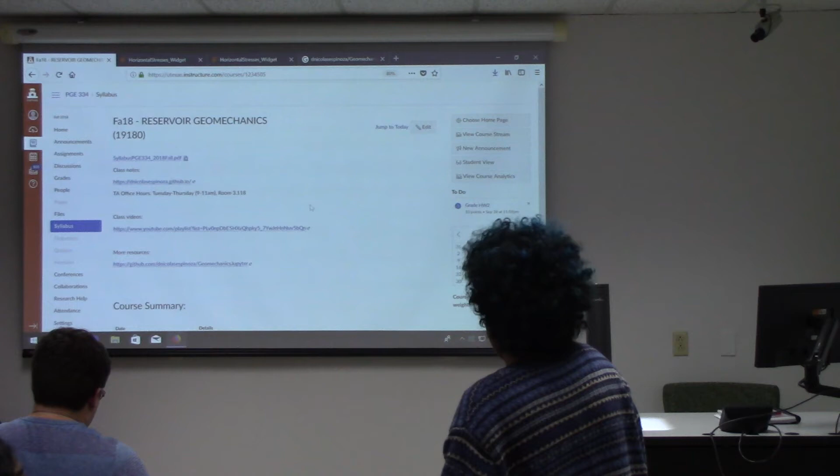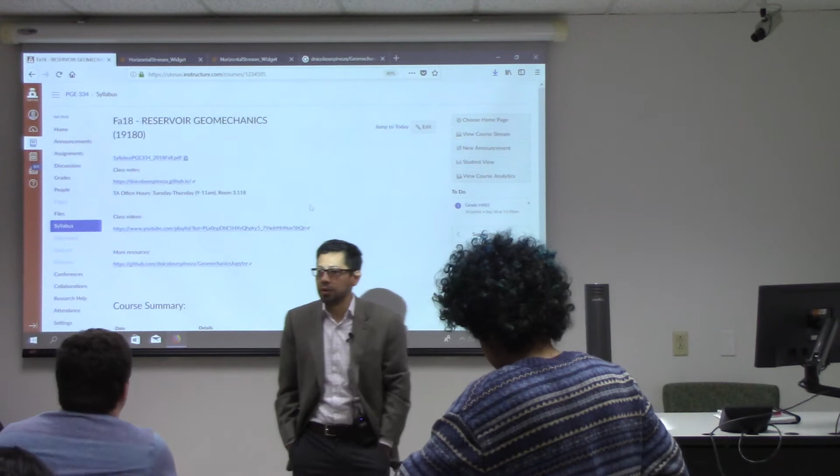Any questions about the homework? Going well or not? This is your time to ask me some questions if you can't solve it, because it's due tomorrow, remember? So anything I can help clarify, anything that wasn't clear from the lectures? No?

I have some good news for you. If you didn't check the emails, you can go here to YouTube, and they are already uploaded, all the classes. I'm going to continue uploading all of them.

I have some bad news, though. First one, I was looking at the videos—they're quite boring. Okay, so I'm going to try to be a little bit more cheerful to make these videos a little bit better. And second, you guys can see it over there as long as you don't touch the cable, okay? Or you can plug it and unplug it very quickly if you want to.

And second, I need to fix some of the audio issues. There is one lecture in which the audio is not great, and there is another lecture in which there is no audio at all. So I'll try to see if I add subtitles or if I can add audio on top of that, but I'll try to fix that.

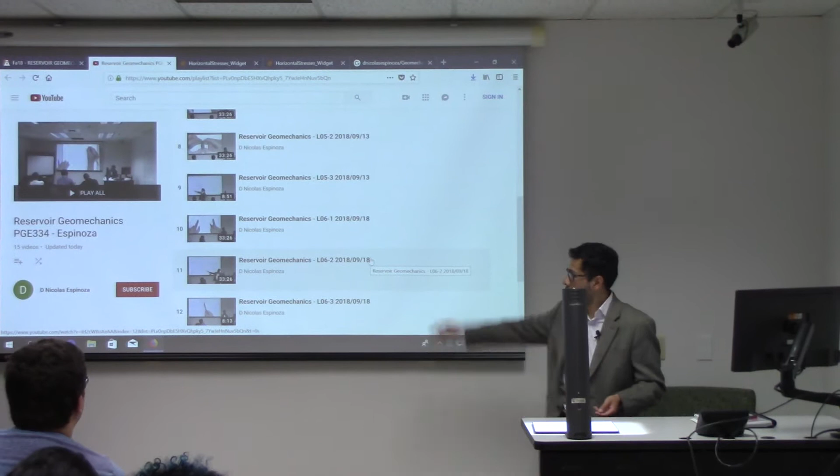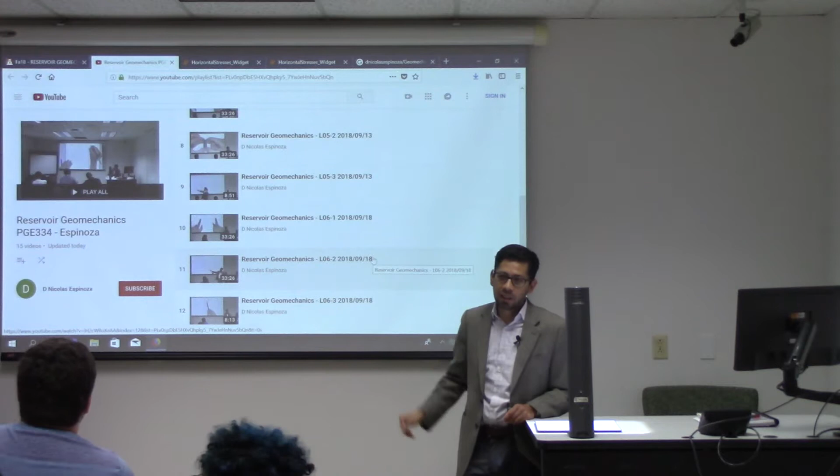If you have any questions, just let me know. So I'm going to continue uploading all the videos. And I have figured this YouTube thing now, how to upload videos quickly, so it wasn't as bad as I thought. And actually, you can do some editing there too, which is very, very convenient. So I have to do a little bit of editing to some of them, but the videos are going to be there, okay? And one more thing is that Jeffrey has been working very hard in order to upload the homework solution.

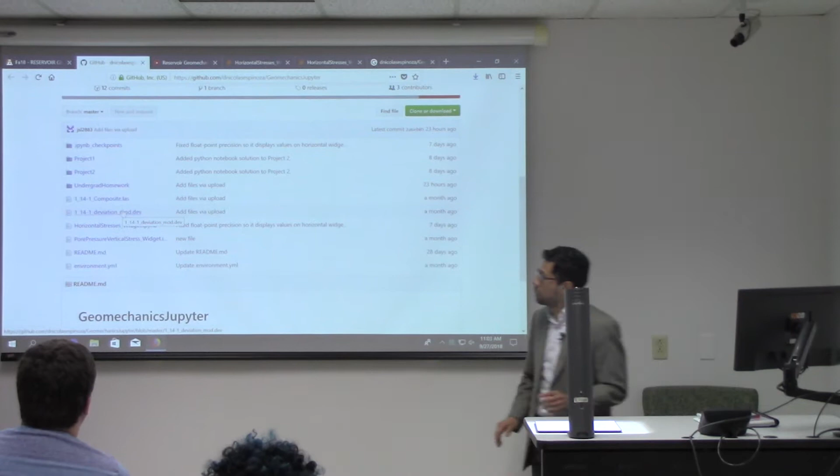Okay, let me come back here. If you go here to more resources, this goes into a folder where I'm putting some of the files that you were using already and some of the widgets that I was showing you, just to show stresses or anything, varying some parameters to understand what is the influence of those parameters. And you can download those and upload them, make them run with Python to see how they work.

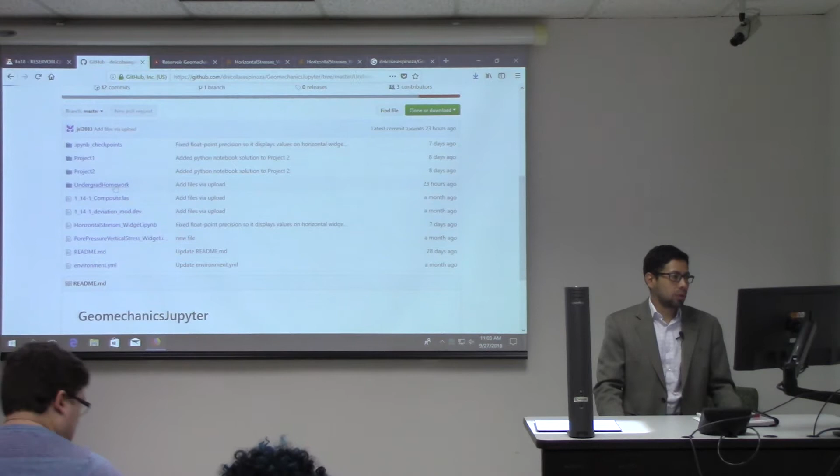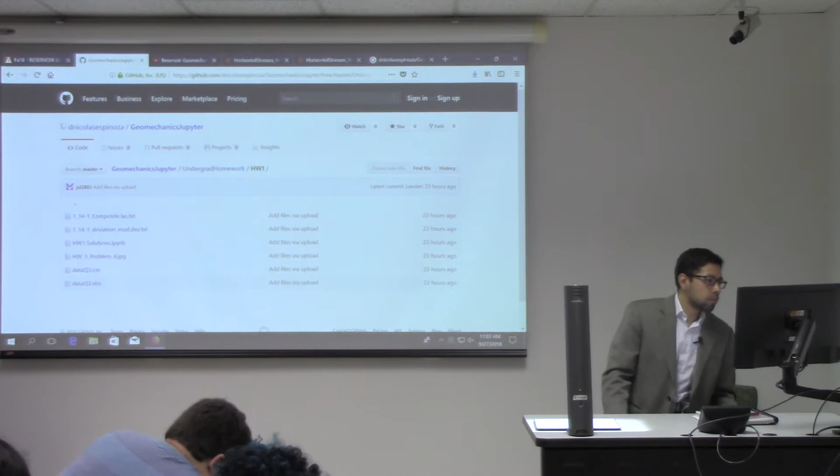But also here, if you go to this undergrad homework folder, you will see that Jeffrey already added homework number 1. And in homework number 1 solution, if you open this file, you will see all the solution with this Jupyter notebook. And actually here, you see you have all the data already compiled. Jeffrey is very good, he's very neat in writing everything. And I think he borrowed—you see here's the solution, and here you have all the code, right? All the code that you need, you can get it from here too.

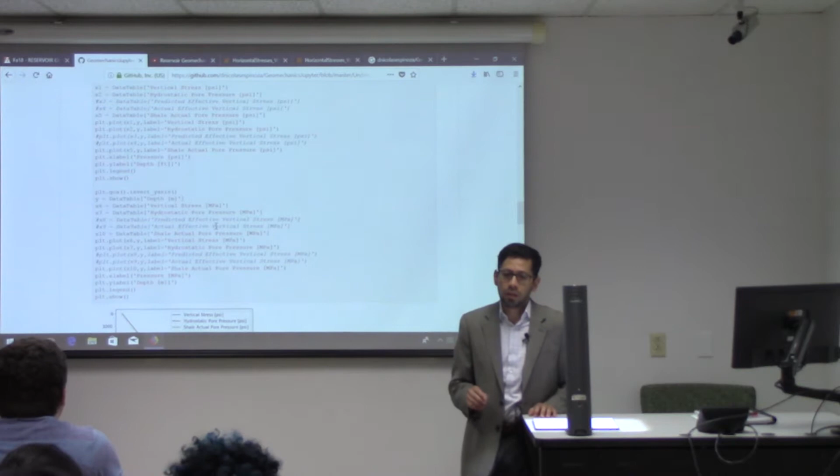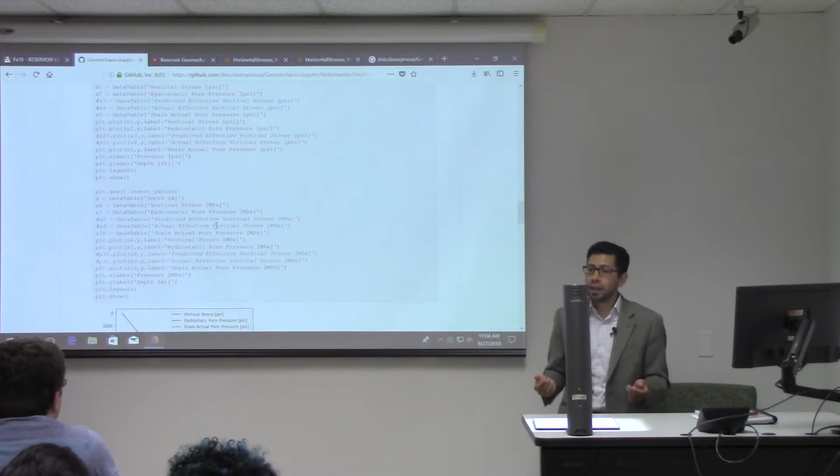The most important to me for the homework is not that you learn to code, but that you learn the concepts. Coding is also very useful, and it may be a very good resource for you in the future. So you may take the code from here and try to run your homework later to see if it works with that or not. But the most important thing are the concepts for now.

Here you have problem number 4, and I think he borrowed this from some of you. I don't know if he added the credit here or not. Yeah, here's the credit. So thank you very much, Nathan, for that, and that's working very well. So check the homework solution there. And he's going to work on homework solution number 2 to have it by Monday.

Yes? Question 4 in the homework, do you care what units we put the answer in? In this one—the homework that we have to submit tomorrow? Tomorrow? If it doesn't say, no, I don't care.

But sometimes I really want you to change units to be comfortable with both SI and field units, so in that case, yes. If it says answer in MPa, you should give the answer in MPa. Okay? I don't care which way you go—if you go first through PSI and then you get to MPa, or if you go through MPa and you get to PSI. I recommend, though, that you go through the whole calculation all in SI, and then you come back to field units, because otherwise you have to use some factors there to correct your formulas. But as soon as you get the right solution, I don't care.

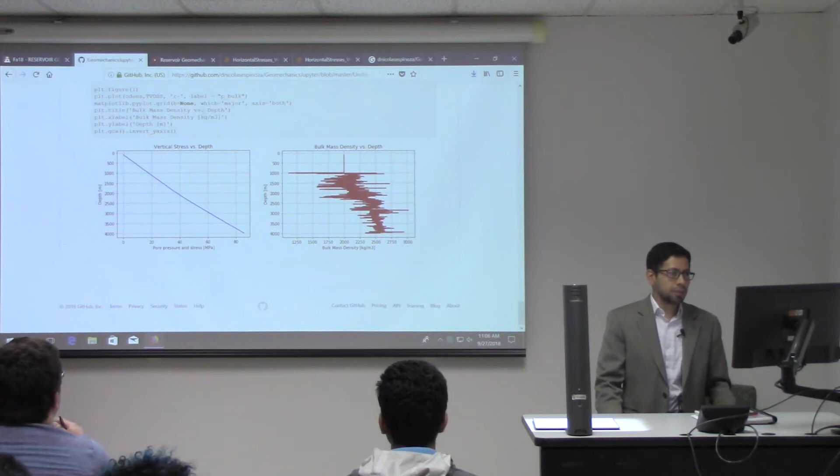Okay? All right, so you're now working on homework number 2, and this one will be uploaded soon. Also for next week, remember that we have an exam on October the 5th, right?

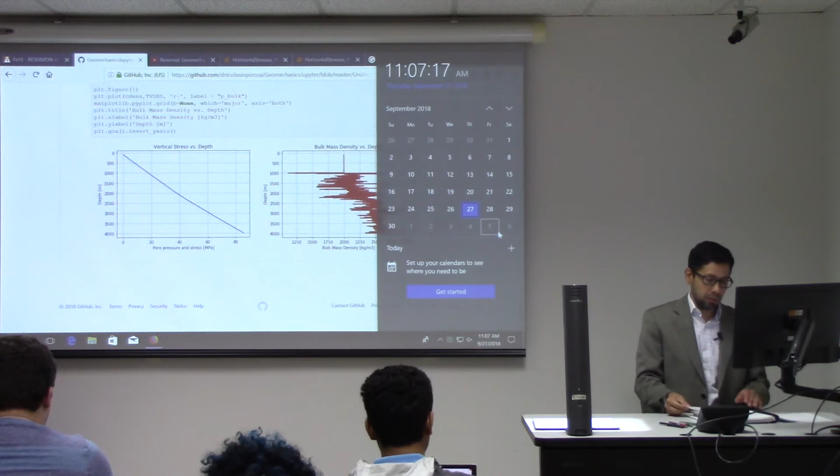So finish the homework. I'll upload the solution as soon as you make the submission, so you can check on that. It's very important to me, as I told you in the email, that you train with problems before you go to the midterm. If you train with all these problems I gave you, the midterm will be very easy. But if you don't train, it's going to take a lot of time. You may get confused, see numbers you never saw before, and not know if they make sense. The most important thing when solving problems is to check the numbers and make sure they make sense.

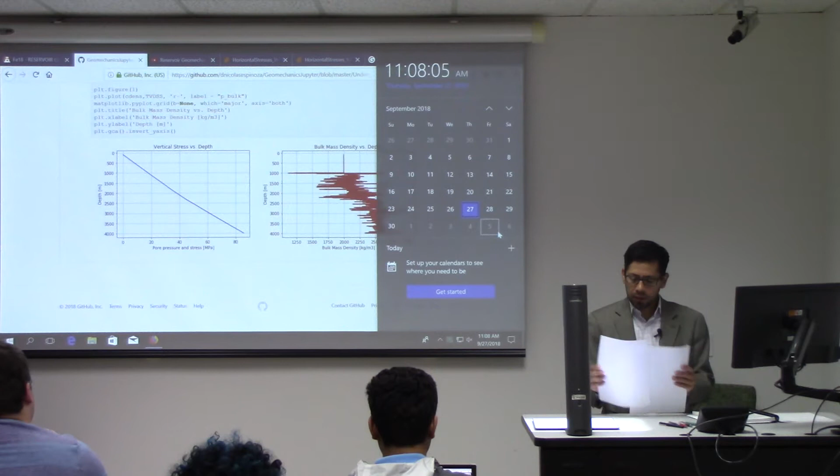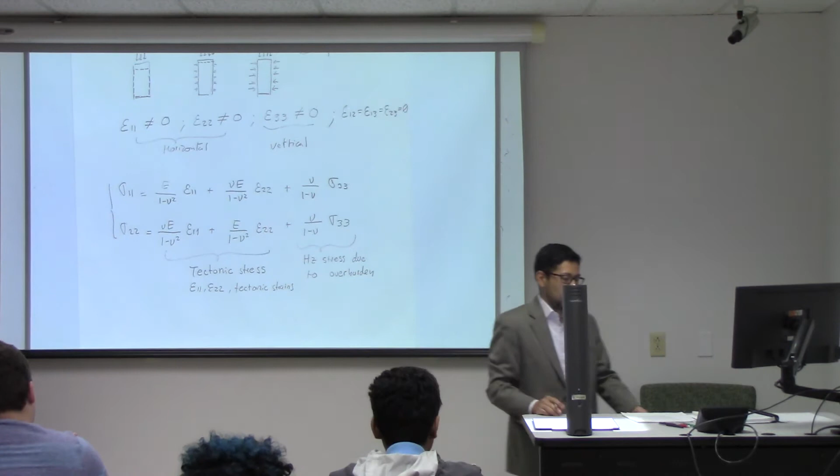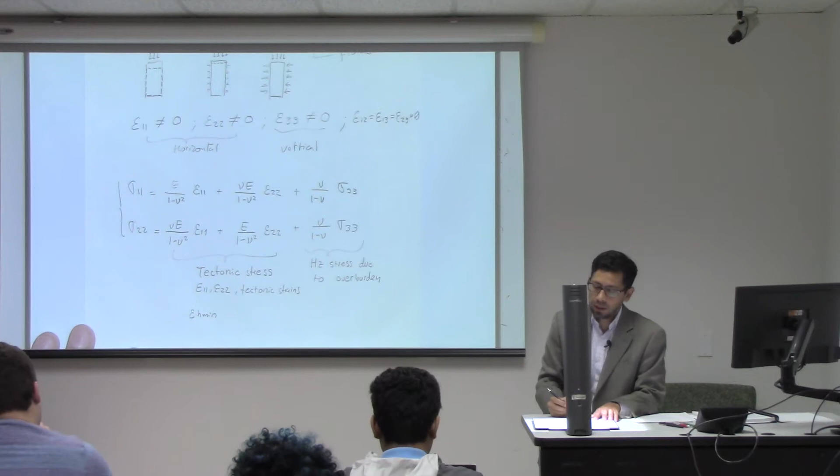Okay, let's continue with the lectures. I don't know if you've realized, but with these equations we saw last time, we're now able to calculate horizontal stresses. Usually instead of using the equations as they are mathematically, which don't tell us anything meaningful, we use epsilon h min, the minimum tectonic horizontal strain, and epsilon h max, the maximum horizontal tectonic strain. From here, instead of calculating sigma 11 and sigma 22, we calculate sigma h min and sigma h max. It's exactly the same equations, I'm just changing the meaning of those.

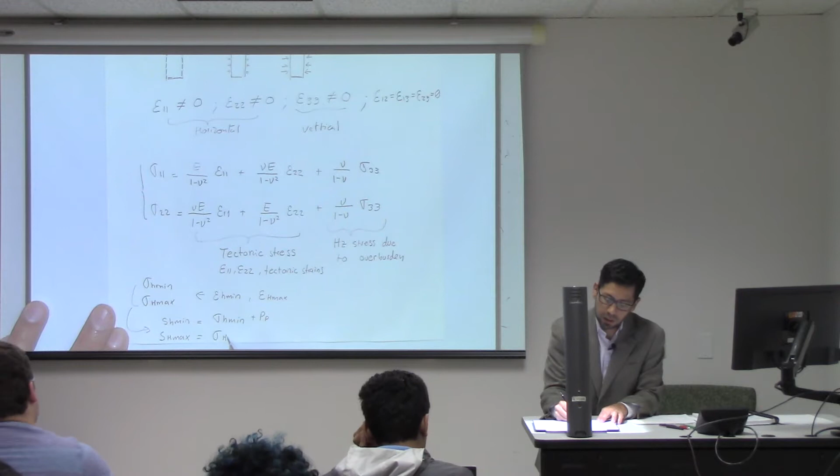And if, for example, we want to calculate sigma h max, let's say sigma 22, epsilon h max is going to be here, in the same orientation as the stress. Once you calculate those effective stresses, you just add pore pressure, and you can calculate SH mean and SH max, which will simply equal sigma h mean plus pore pressure and sigma h max plus pore pressure.

This is a very important finding, because now we're able to calculate horizontal stress. If you remember back in the first or second lecture, we said we can calculate vertical stress, but we cannot calculate horizontal stress because we don't have enough information. Now we do have that information, and it comes from the properties of the rock, its Young's modulus and its Poisson ratio. With those two, we can now calculate effective stresses.

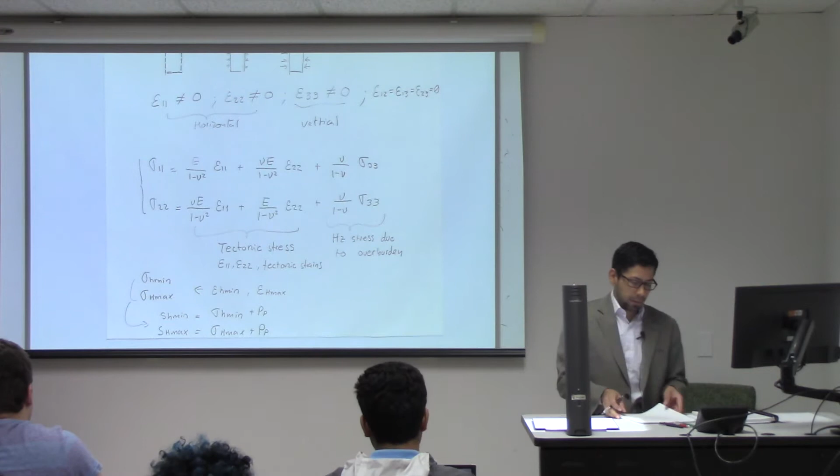And let's see why it's important to calculate horizontal stresses. So now we know these values, SH mean and SH max. Let's say that you go to the Permian Basin, and after drilling, you want to do hydraulic fracturing, and you're interested in doing that on a given formation at a given depth.

Actually, this weekend I did go to the Permian Basin. I went to visit a friend there in Midland. It's amazing the amount of wellheads, jack pumps, and drilling rigs around there.

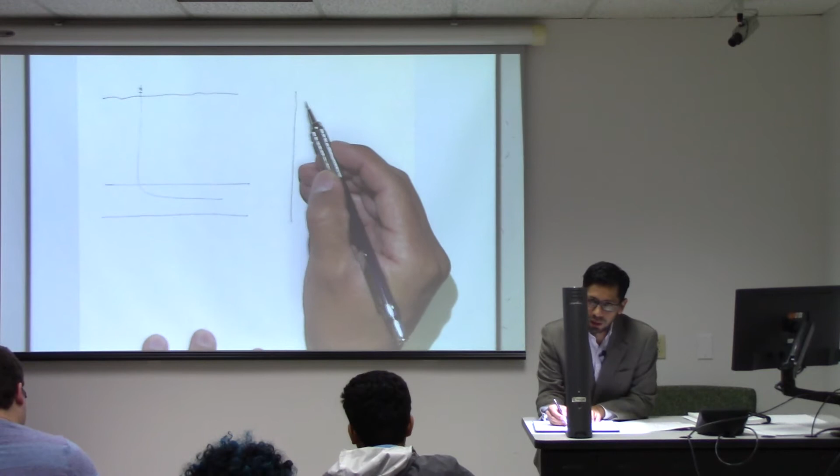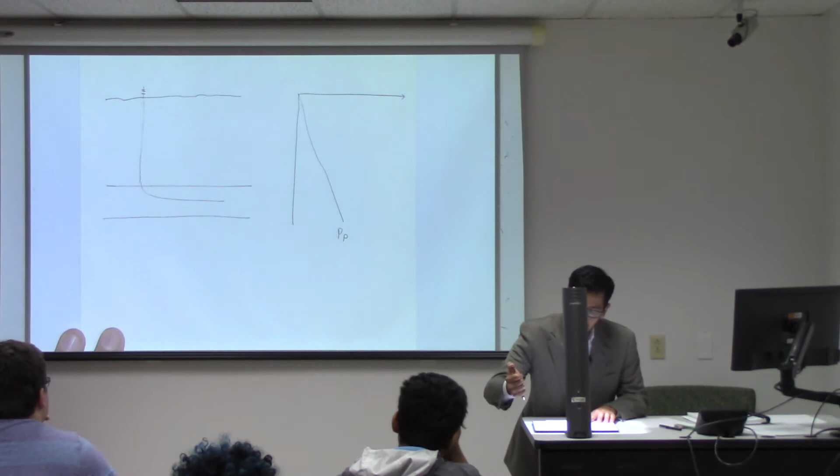So, from some time ago, we already knew how to calculate pore pressure. We already knew how to calculate vertical stress. If you remember, that was an easy one.

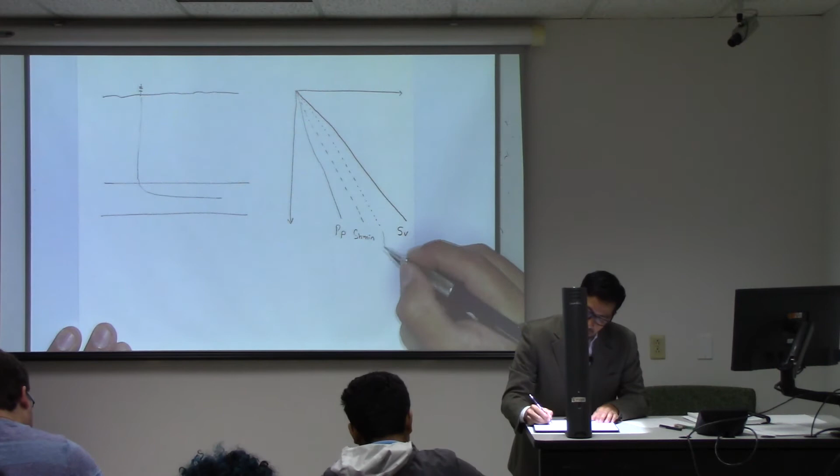And now, with the new tools we have, which is elasticity, we can calculate SH mean, let's say somewhere over here, and we can also calculate SH max. I'm not going to make a lot of emphasis now on SH max, but you'll see that this one is important too.

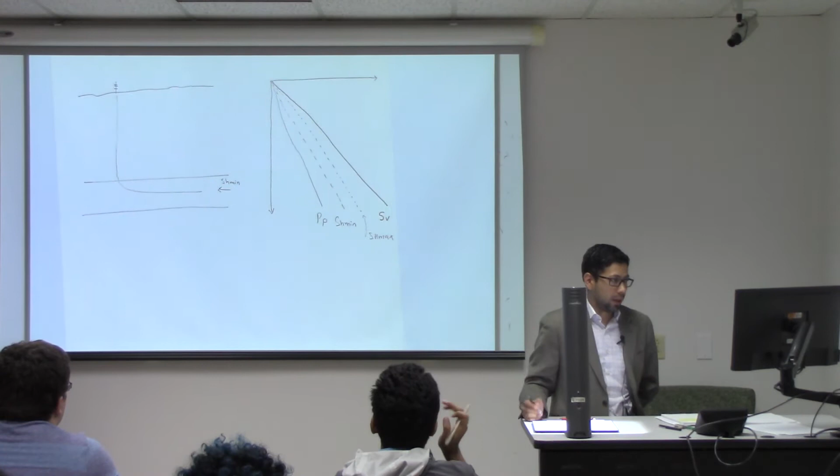Now that we have those values, why is SH mean important? What is SH mean going to give us? What kind of information? Any guess? The direction of SH mean, yes, it's going to tell us the direction of fracturing. For example, if we had SH mean going in the direction of the horizontal wellbore, for these stress conditions, that tells us the fracture is going to be perpendicular to that. But what else? What else does SH mean give us? What about the value of SH mean?

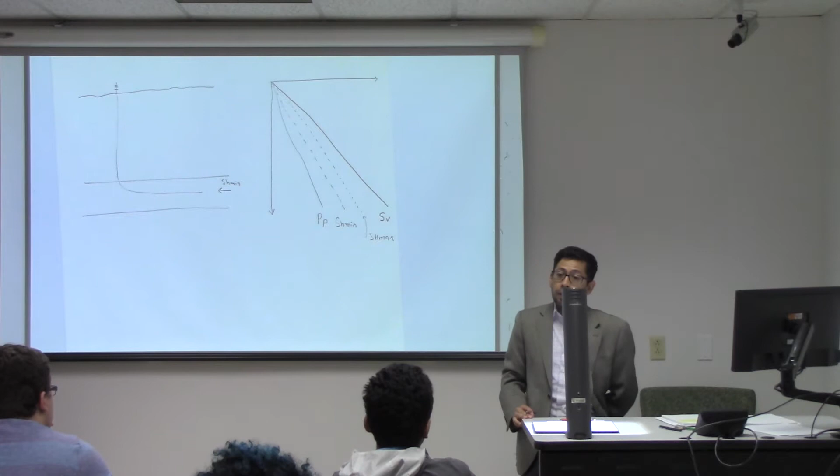Any clue? The pressure of our fracture is the absolute minimum pressure needed in order to open a hydraulic fracture, or what is called an open mode fracture. Now, if the pore pressure in the rock at this depth goes above that limit, you are very likely in a region close to opening a hydraulic fracture. We'll see later it's not exactly that value, you need a bit more pressure to overcome viscous forces, deform the rock, and make fluids go into the fracture.

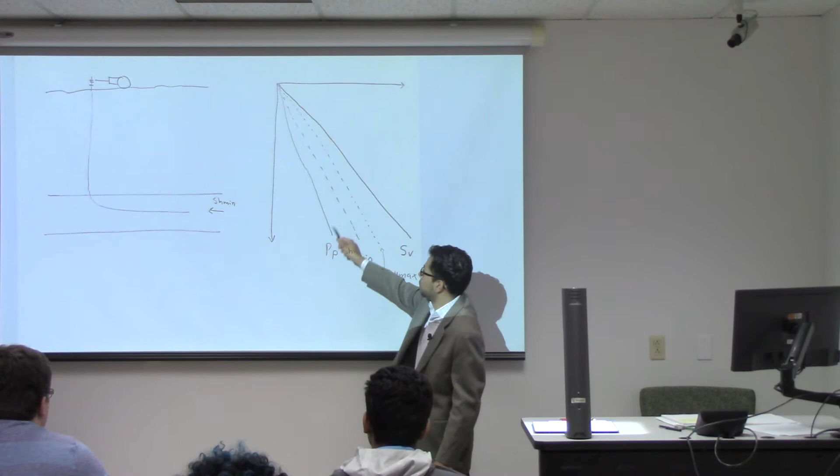If you want to design the pumps at the surface needed to pump fluids into the formation, you know the pressure required must at least overcome that minimum principal stress. So in other words, how is that called? Starts with F. Any guess?

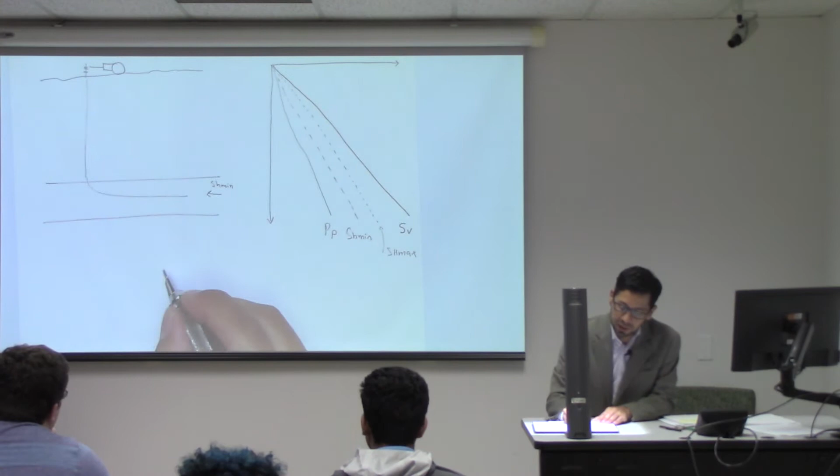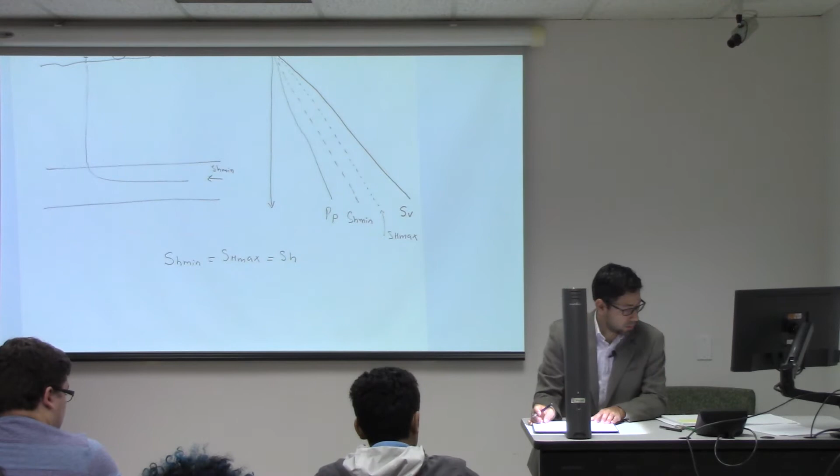Well, while you think, let me write some equations that you already know. Let me assume this is SH max, and let's simplify it and call it SH. We'll do the simple case, but it's the same for the other case. If I don't have tectonic strains, do you remember the value of the effective horizontal stress? We already know this, right?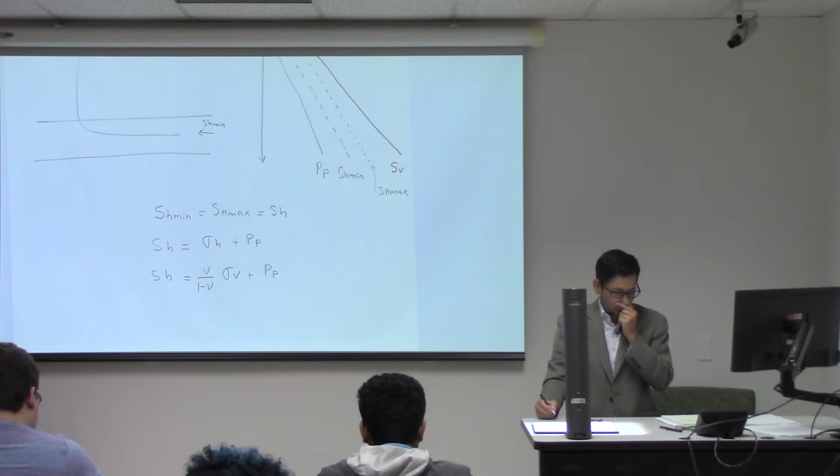Total stress equals effective stress plus pore pressure. But what is going to be the horizontal stress in the absence of tectonic strains? This is an equation I'm not going to ask you to know by heart, but you should try to remember. Times what? Vertical stress, right? Okay, very good. So what is the effective vertical stress?

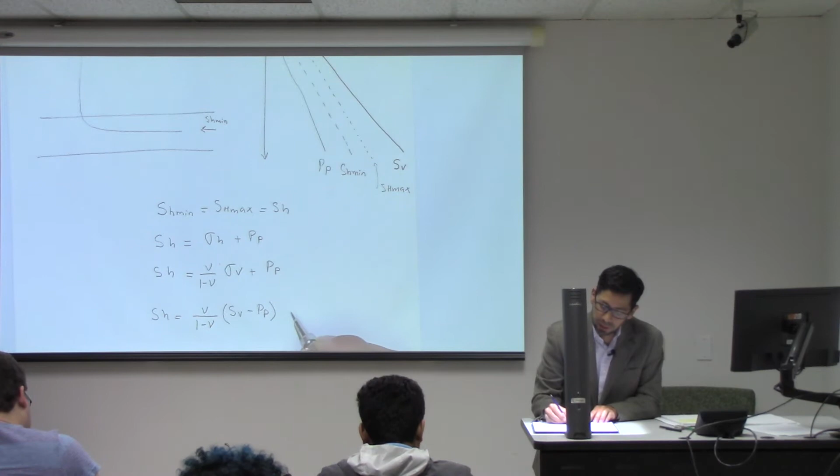Something very important: effective stresses are very important, but we cannot really measure them in the field or calculate them directly. Instead, usually you either measure horizontal stresses or you calculate total vertical stress, but effective stresses are very difficult to measure or calculate directly. So instead, sigma v is going to be the total vertical stress minus the pore pressure, right? So I didn't do anything new so far.

And from here, you see that now I can write this equation as this times SV. And now I have pore pressure here, I have pore pressure there, and this is going to be a common denominator. This is going to be... let me see. One minus what? You know, it's very difficult to do math in front of people. If I were to do this on my own it would be very easy, but what? Okay.

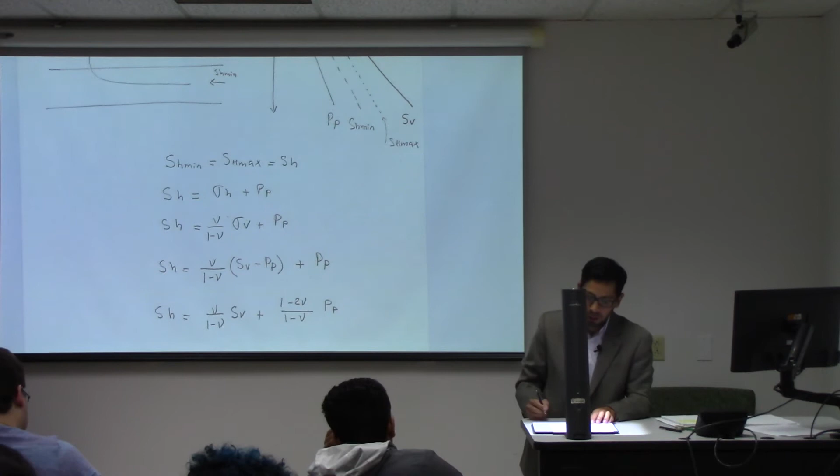Remember, this is a Greek letter nu, it's not a b. So it will be... let's see. It will be 1 minus nu, and this is going to be 1 minus 2 nu, right? You agree? Okay, let me check if that's okay. Yeah, that's okay. Times pore pressure.

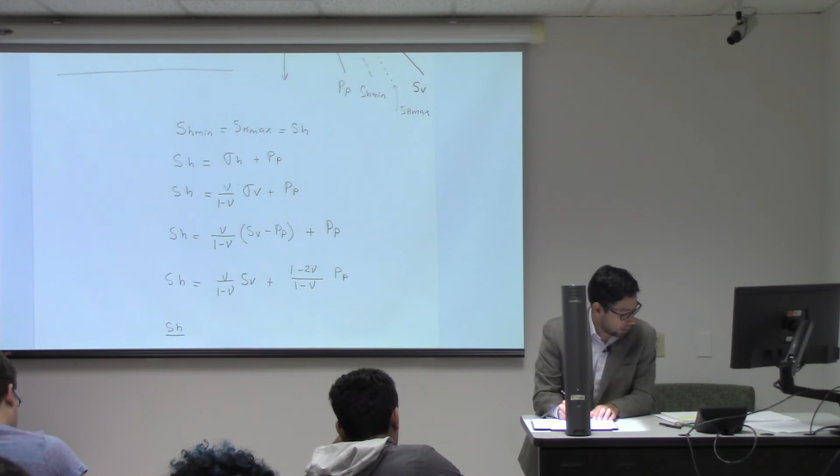And this is the same equation, but now expressed in terms of vertical stress and pore pressure. So you can calculate the horizontal stress, the total horizontal stress, with the total vertical stress and the pore pressure. But now let me do just something very simple but very meaningful. I'm going to divide this SH by an amount delta Z.

And actually what I'm going to do is take the derivative of this. So the derivative, if I use deltas instead, the derivative of SH with respect to Z is going to be... this one we're going to assume is constant. Does vertical stress change with depth? Total vertical stress? Yes or no? Yes, right? So we cannot ignore it, and it's going to be that.

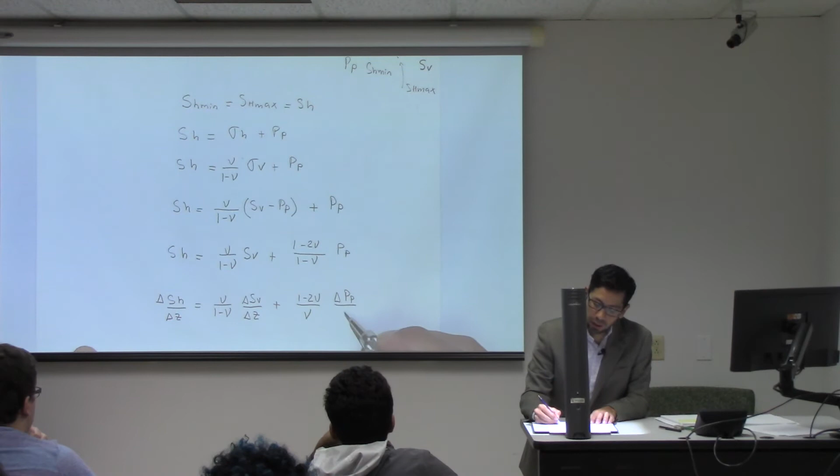And what about pore pressure? Does pore pressure change with depth? Yes, so we cannot ignore it either. What is this? We already know this guy: vertical stress gradient, right? Total vertical stress gradient, or if I want to write it more compactly, the lithostatic gradient. It's the same thing.

What about this guy? Wait, I'm missing here 1 minus, right? What about this guy? We already know that one too. Remember that hydrostatic is just an assumption to make things easier, it doesn't work all the time. Actually, most of the time it doesn't work. So in general, this is going to be the pore pressure gradient.

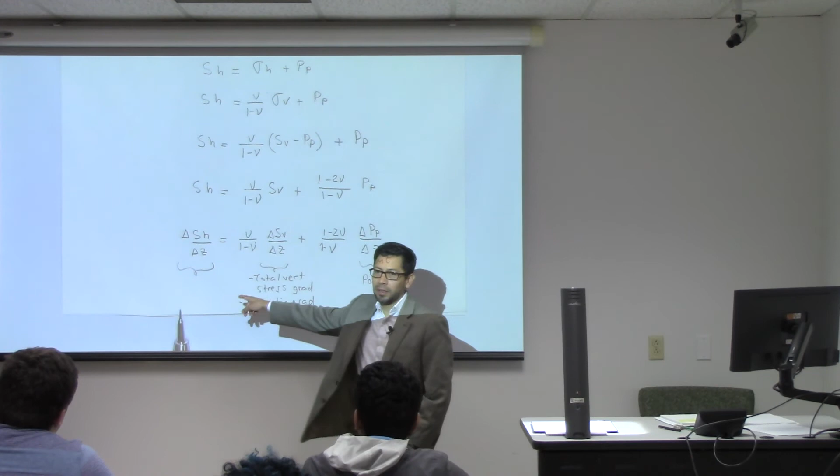And we get to where I wanted to get, which is... what is this? I know you know it. It starts with F, and it's a gradient too. The fracture gradient, right? So you remember that before we were talking about fractures. So what is the pressure that you need in order to open a fracture here? It depends on the minimum principal stress, and it depends on a few more things.

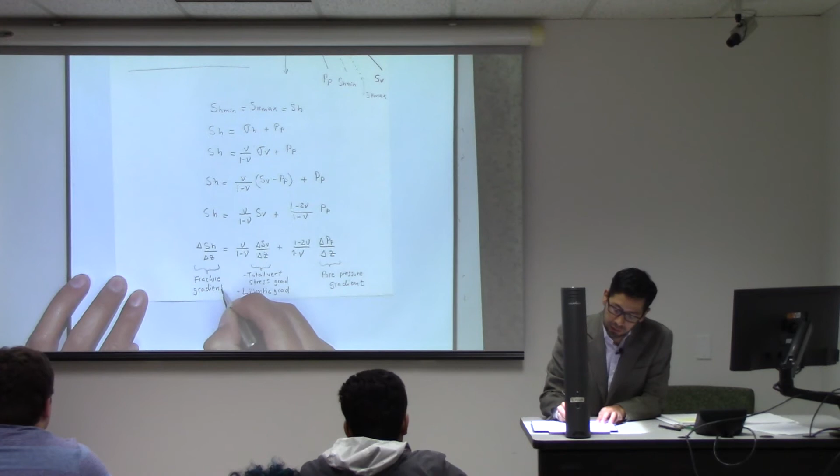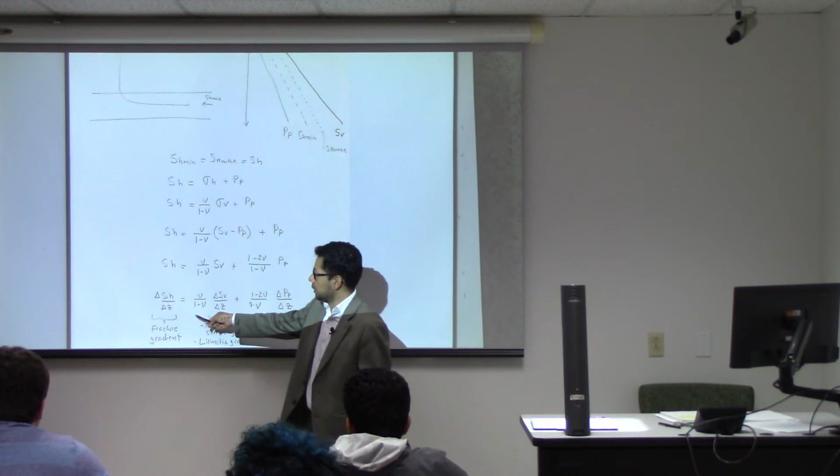But now we're going to simplify it, and the lower bound for that fracture gradient is going to be this. This is the fracture gradient. So now, by knowing what the horizontal stress is, we can calculate the fracture gradient. With this number, you will calculate the value of the density in the drilling mud that you will need to open a fracture if you were drilling, or this value times depth will give you the pressure needed to fracture a formation at that particular depth.

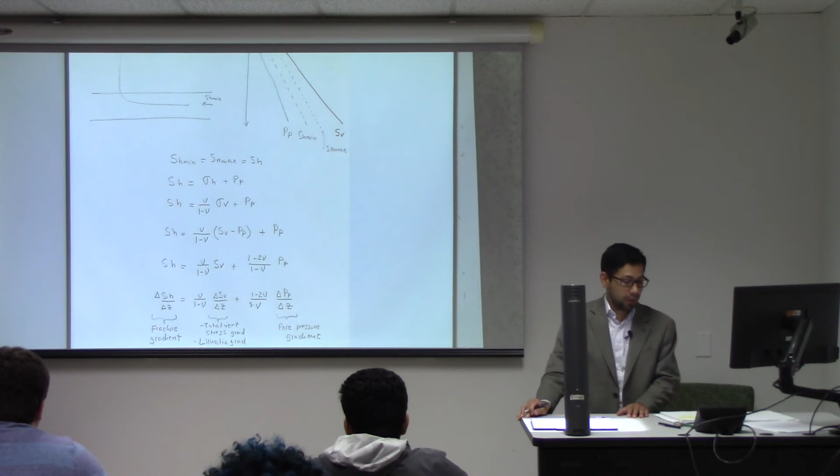So horizontal stresses are very, very important in geomechanics. And now with elasticity, we have found a way to calculate those.

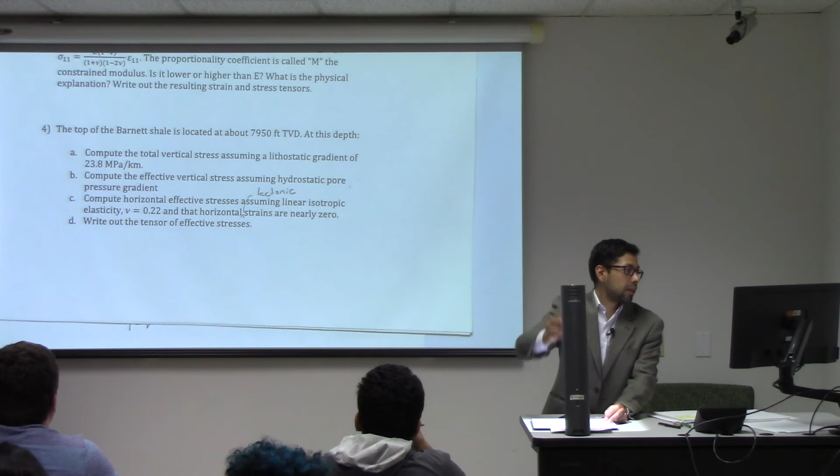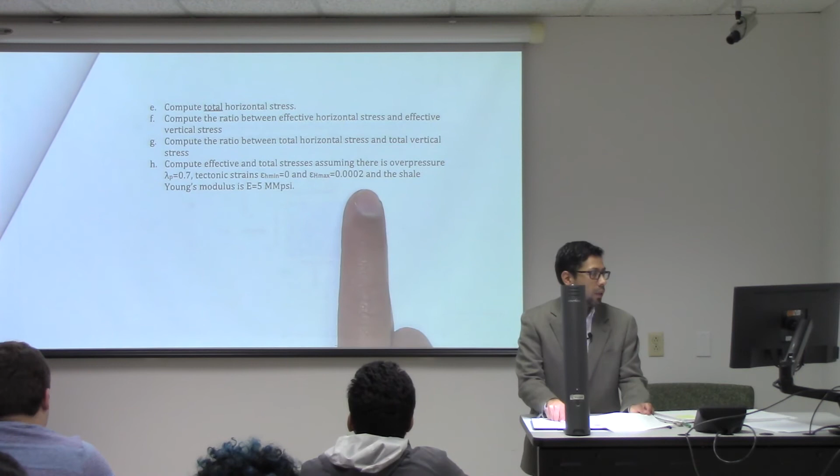So if you go over here, you will see it gets a little bit more complicated, and you have additional tectonic strains. When you have those tectonic strains, you have to consider also the Young's modulus. And also you have an overpressure in this case. In the Barnett shale, there is no hydrostatic pore pressure - the pressure is actually higher than that.

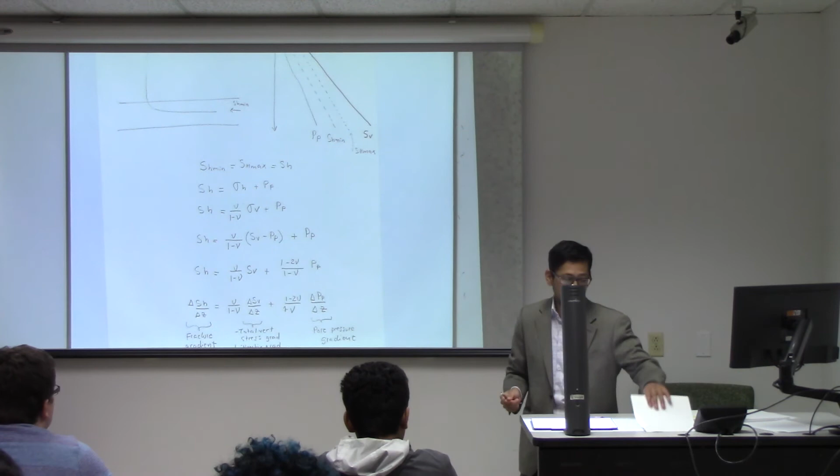Any question? This is the same thing that we have seen so far. I just wanted to give it another twist and calculate this fracture gradient based on these equations. But it's exactly the same thing that we have seen before.

Yes, Mr. Awa - for derivations on the exam? No, I'm not going to ask for derivations. The only thing I'm going to ask is working out these problems of elasticity with the matrix and knowing what are the strains or what are the stresses to calculate a given modulus. By the way, I'm going to give you also practice exams, okay? So if I don't do that by Friday, please send me an email, remind me that, so you have time to practice with those.

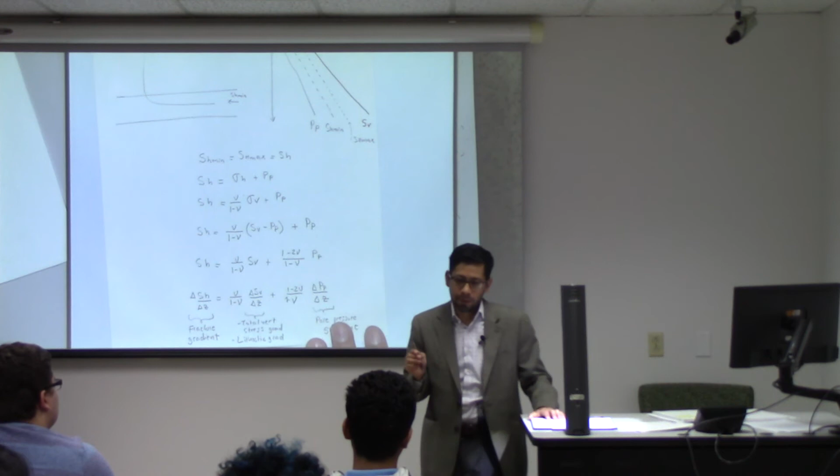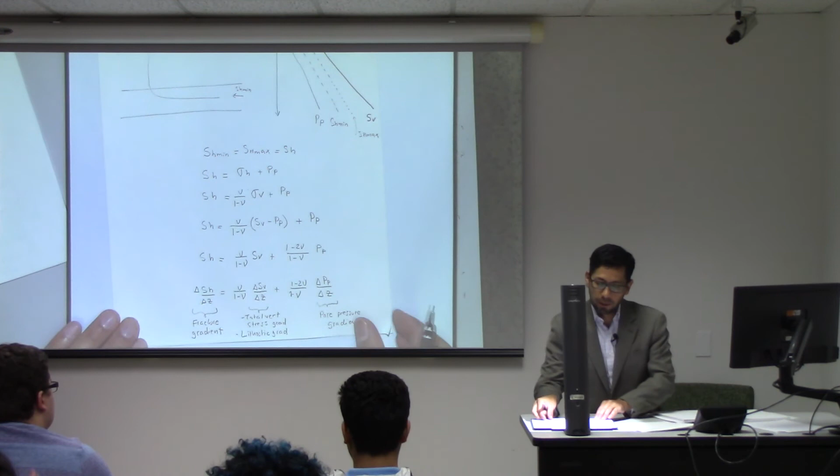Okay, so we have seen the concept of fracture gradient. I'd like to talk now about another application of elasticity, which is very important.

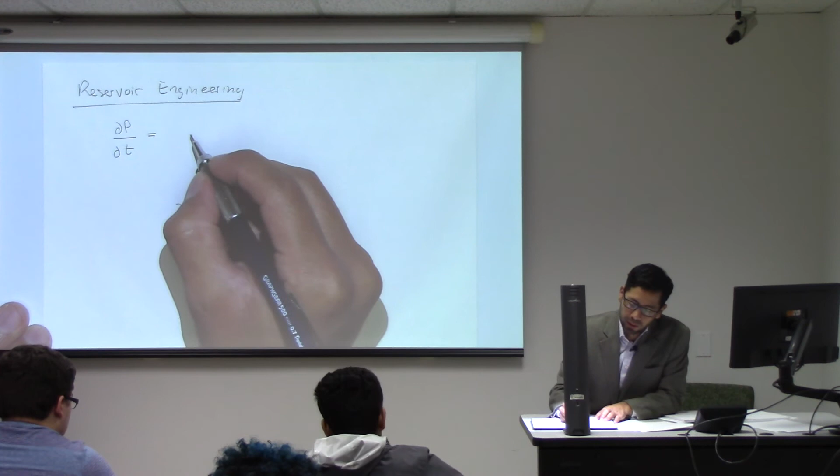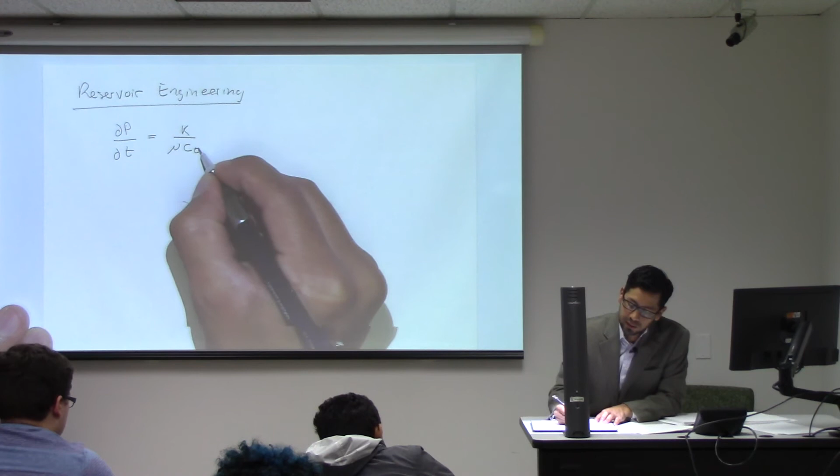Do you guys remember the pore pressure diffusion equation, or the diffusivity equation in general? Anyone remembers that by heart? I should, but I don't remember it quite well. But it's something like this. It tells you the variation of pressure with time. It depends on, and this is where it starts to blank, okay? It's, I think, K divided by viscosity and compressibility, something like that, okay? And that tells you the variation of pressure in space. This is in 1D.

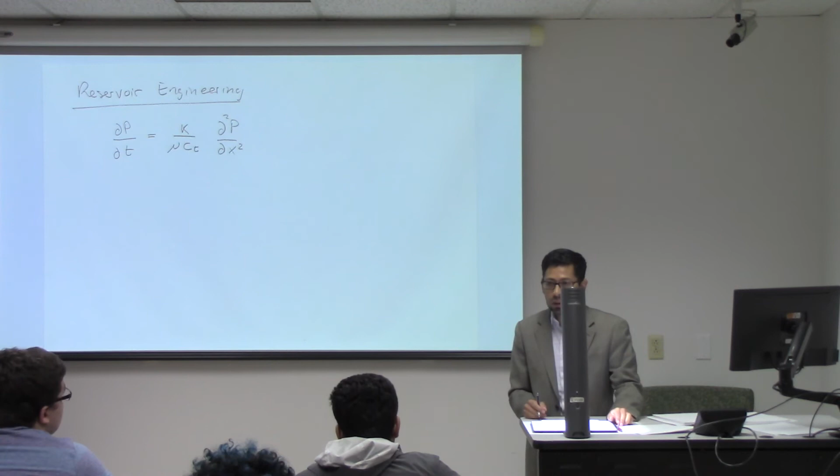But something very important here is that when you solve any problems related to fluid flow as a function of time, as a function of space, like if you're draining the reservoir or injecting a fluid, then you need to solve this equation. And this is actually what you do in reservoir engineering - you just solve this equation. It's a little bit more complicated than that, right? But you're just solving that equation.

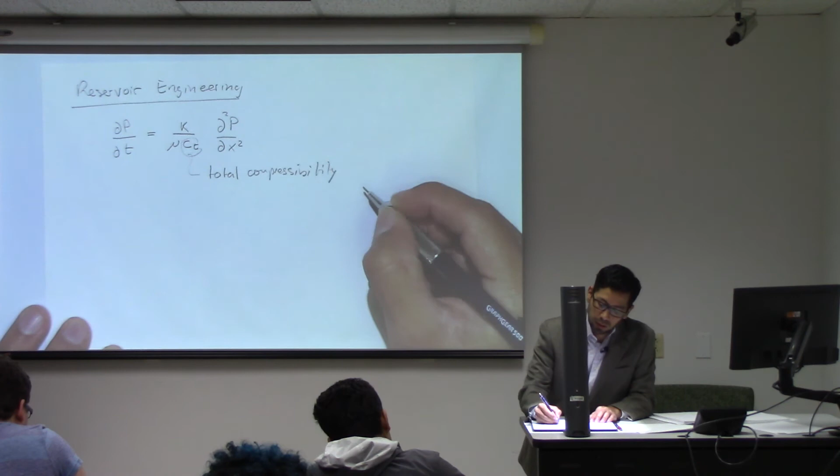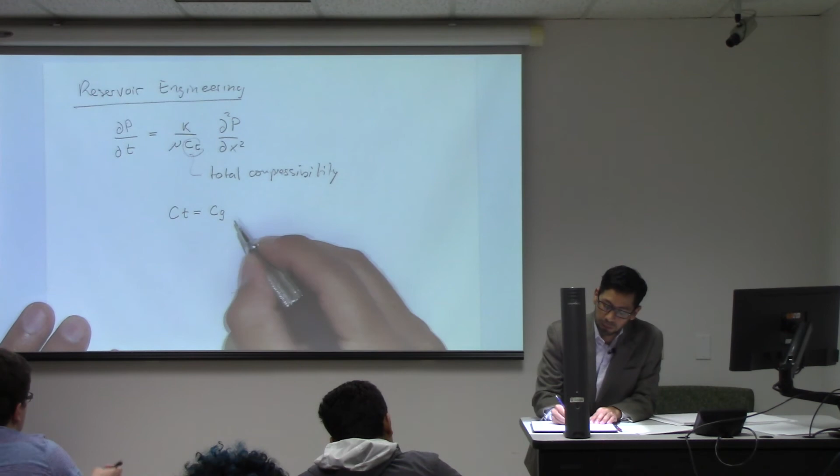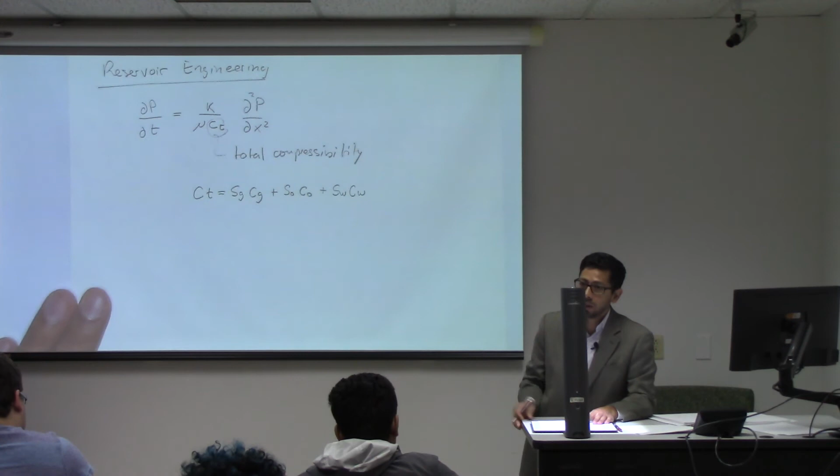A critical parameter in this equation is, in addition to permeability and viscosity of the fluid, the total compressibility of the formation. And that total compressibility is composed of the compressibility of the phases. For example, if you had gas, it will be the compressibility of the gas times - let me change this to the volume fraction coefficient. It will be saturation of gas times compressibility of gas plus saturation of oil times compressibility of oil plus saturation of water times compressibility of water. If you had some other fluid, like nitrogen or CO2, you will put it in here, okay.

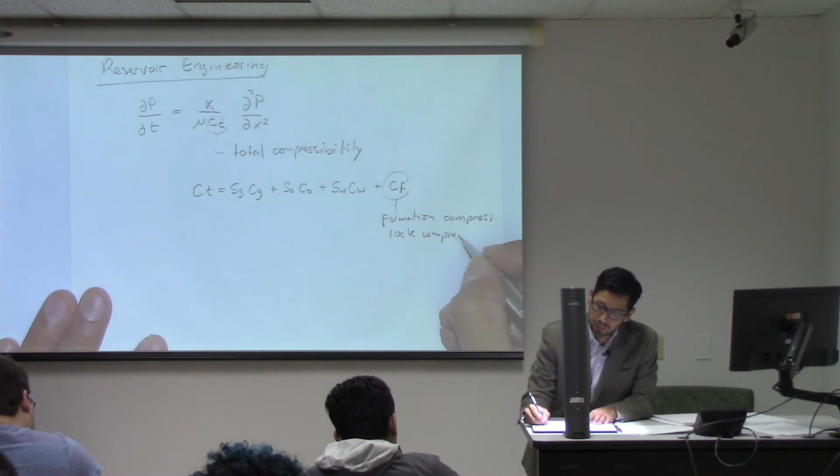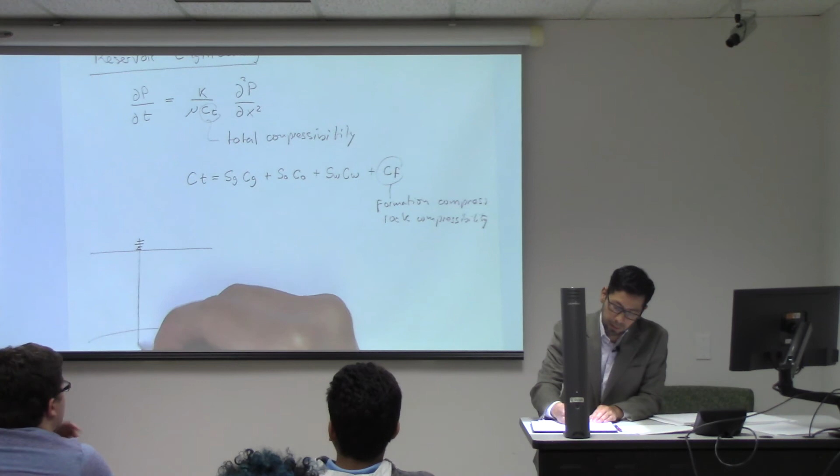Plus one more coefficient, which is the formation compressibility or the rock compressibility. When you change the pressure in a reservoir, the volume of the pore is going to change, right? Let's do an example over here. So let's say that you're producing from a formation at a given depth, and you are changing the pressure with time.

And here you have a piece of rock which originally has this volume given by that square. And let's say on top of this you have a shale, which is applying an overburden stress to that reservoir.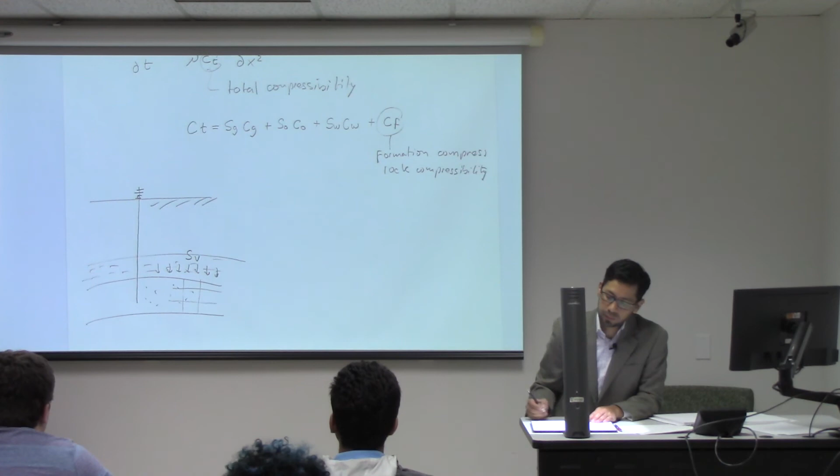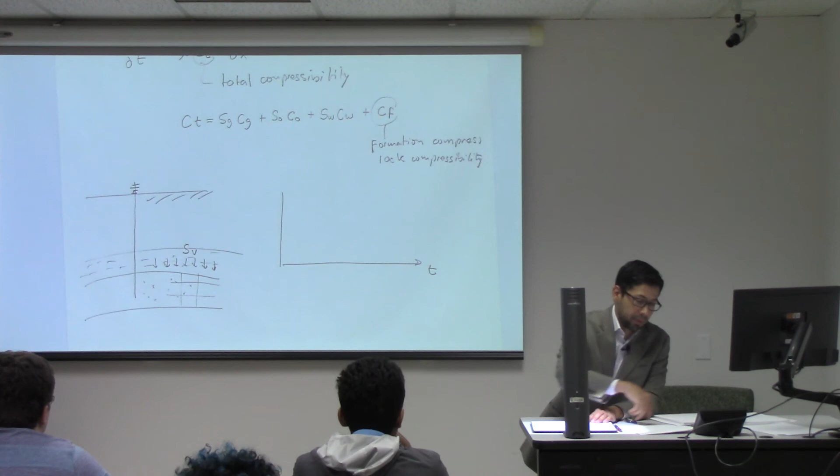As a function of time, what we're going to do is pump, right? So if we pump fluids out of here, you could inject too, okay? It's a similar problem, but let's work with the problem of pumping.

What is going to happen to the pore pressure with time? It's going to decrease, right? So the pore pressure, the bottom hole pressure here, you want to decrease that in order to be able to pump.

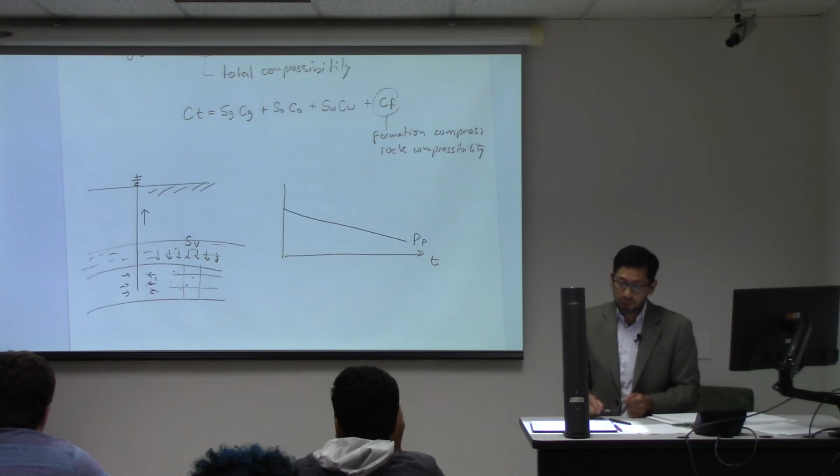What about the vertical stress? I don't remember if we went already through this problem or not, but what happens to the vertical stress, the total vertical stress? What do you think is going to happen to it? Is it going to stay the same, is it going to change?

By depleting these fluids, are we going to change something over here? Is the weight of all the rock on top going to be the same if we do a change over here?

The answer is no. Okay, you're changing fluid saturation here, you're changing porosity here. But if you have a very good cap rock, you're not changing anything above it. You're not changing the weight of the rocks above this. There's a lot of stuff above that. You are not changing that weight.

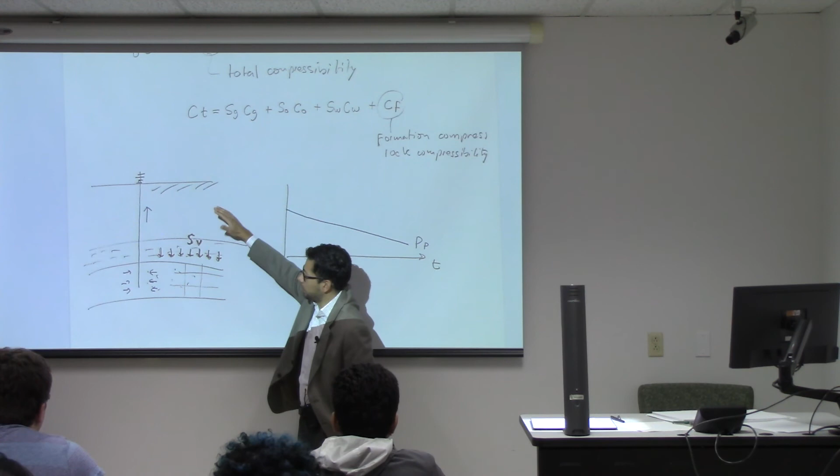And if your cap rock deforms as you produce, the vertical stress is also not going to change. If you have a very stiff cap rock, that may be different. Some of the cap rock may support some of the weight on top. But let's assume this is a cap rock made of a ductile mud rock, so all the weight goes on the reservoir. Because of that, the vertical stress is not going to change.

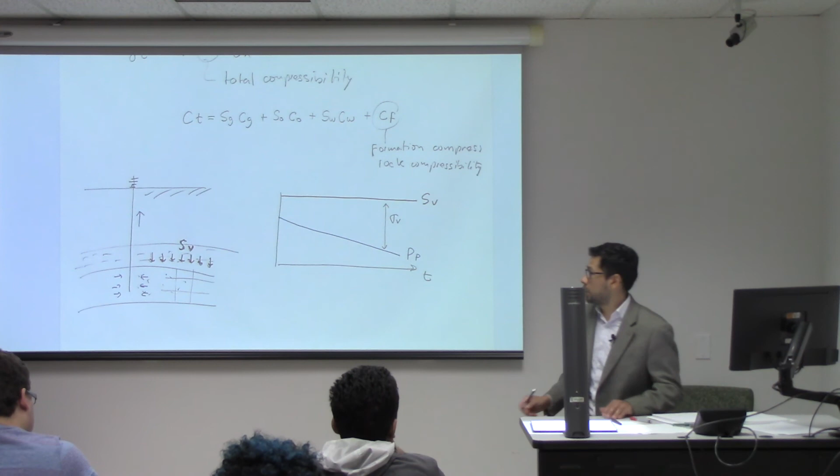It's going to be constant with time. And the only thing we're going to do is increase the effective stress in the reservoir, right? Every time that you lower more and more the pore pressure, you increase more and more the effective vertical stress.

And what do you think is going to happen to the effective horizontal stress? Is it going to increase too? It will, if we assume these conditions in which there is strain in just one direction, and this element of rock now becomes smaller, just in one direction, the horizontal stress is going to increase too.

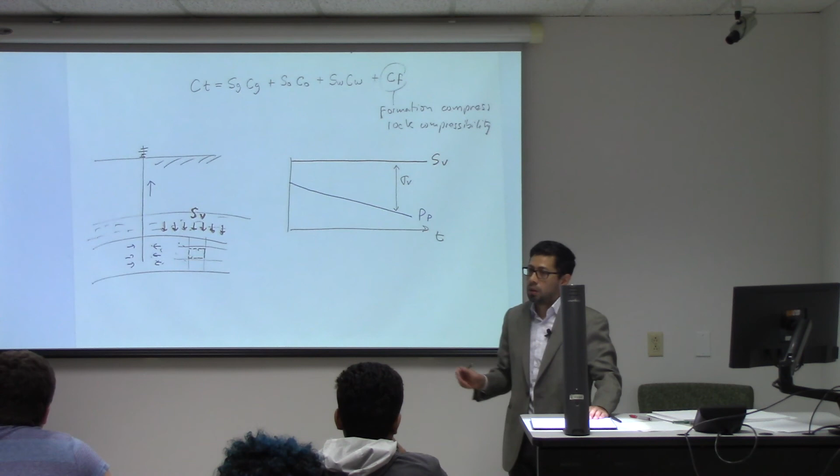But let's not get there yet. Later on, we're going to see equations that are going to tell us what is that variation of horizontal stress. But what I want to do now is calculate this value, formation compressibility.

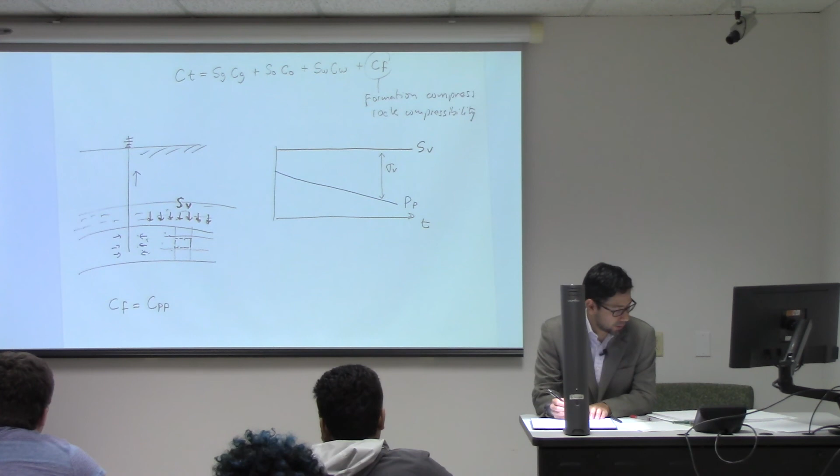By definition, this value, formation compressibility—in order to be a little bit more rigorous, we're going to call it CPP—is the pore volume compressibility, defined as the change in pore volume due to a change in pore pressure divided by the original pore volume.

Considering that vertical stress is going to be constant, and there is not going to be any horizontal strain change, that's going to be constant too. If you remember, guys, when you do these sort of partial derivatives, you add a line here, and those things that are there mean that those remain constant. So SV remains constant, epsilon H remains constant. There is no variation on that side.

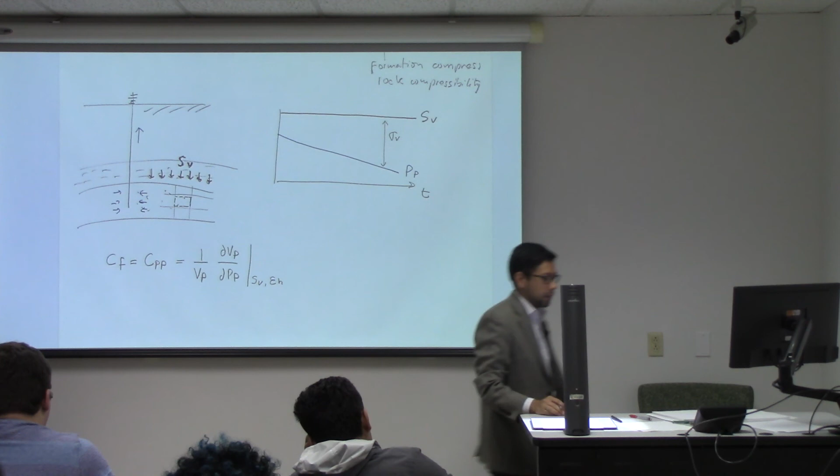This one is called the pore compressibility. And this one is very important because we know that when we lower the pressure, the rock is going to get smaller. And if the rock gets smaller, the pore volume is going to get smaller too.

And do you think that's good for production or not? Why not, Mr. Su? It's actually reducing the pore space, right? Reducing the pore throats and lowering the permeability. And that's not good. That's not good, certainly.

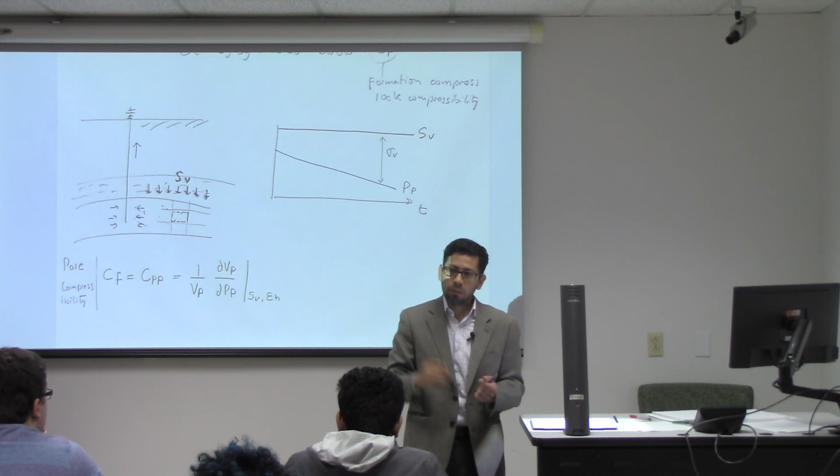But it has the advantage that when you're also reducing the pore size, you are squeezing the rock and facilitating the fluids to move in the rock. So it's like squeezing a sponge, right? If you can squeeze the rock, you're going to get more fluids out of it, and that's going to be the compaction drive. So it's good and it's bad, okay?

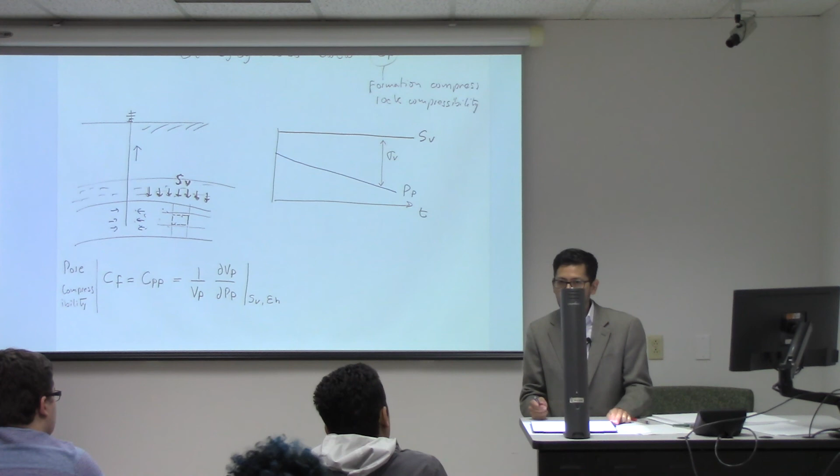So it depends on your rock, and it depends how bad your permeability can get. Actually, I had one student there, I think he presented yesterday, a paper about this problem, doing numerical simulations of how permeability decreases but you get more compaction drive, trying to study that. So he was presenting at ATC in Dallas.

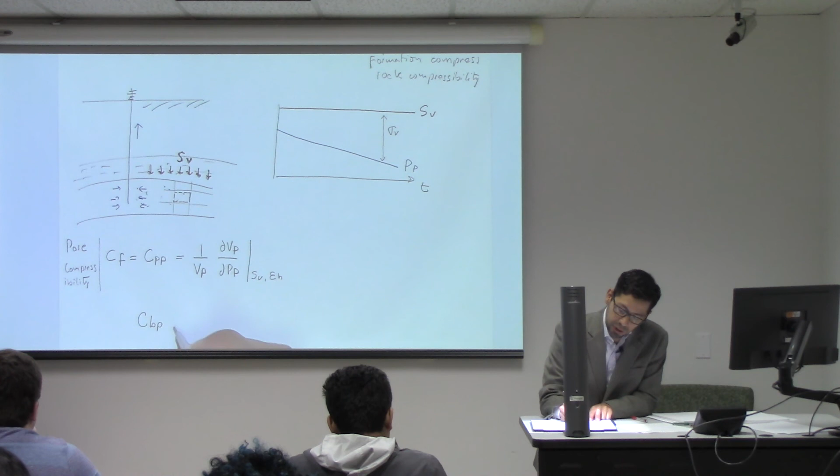Okay, but let's come back to this. So this is going to be the pore volume compressibility. There is another type of compressibility which is called the bulk compressibility.